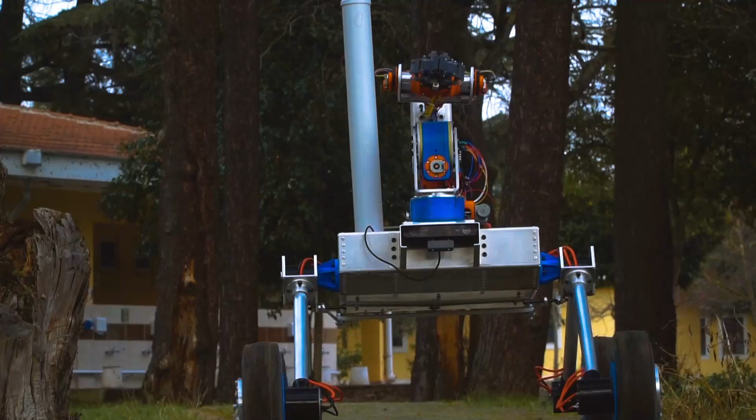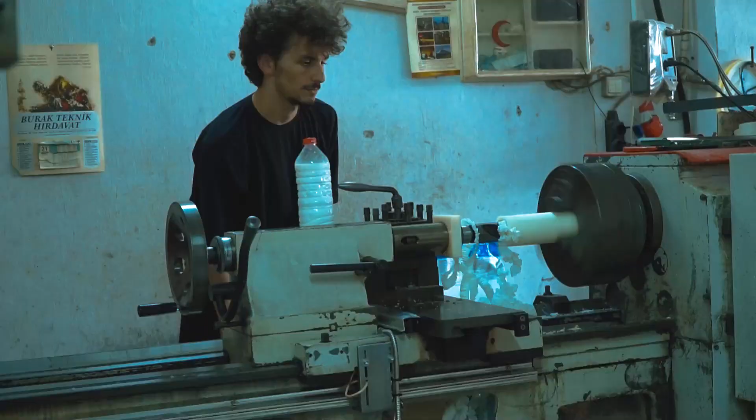Based on the previous experiences from last year, the new rover has been designed and manufactured to tackle URC competition tasks. The subsystems were analyzed in simulations and tested on each task to ensure all requirements are met. After 8 months of hard work, we are proud to introduce our next generation rover.

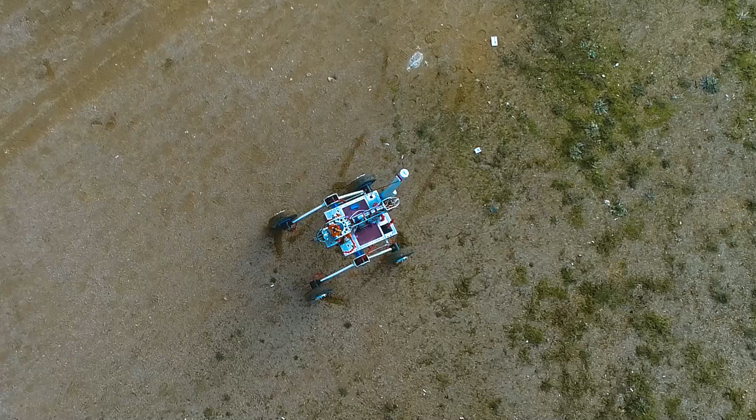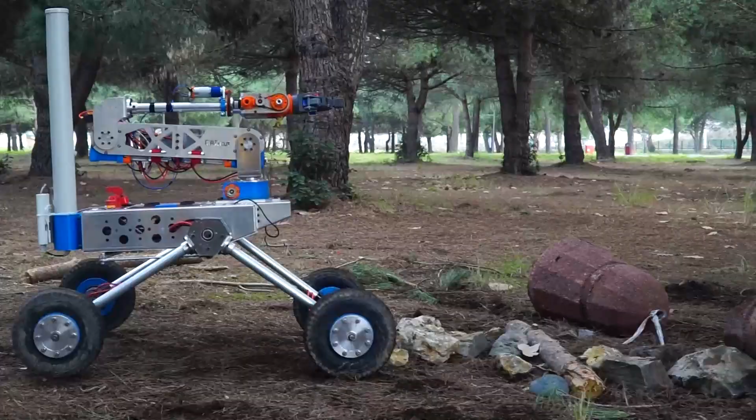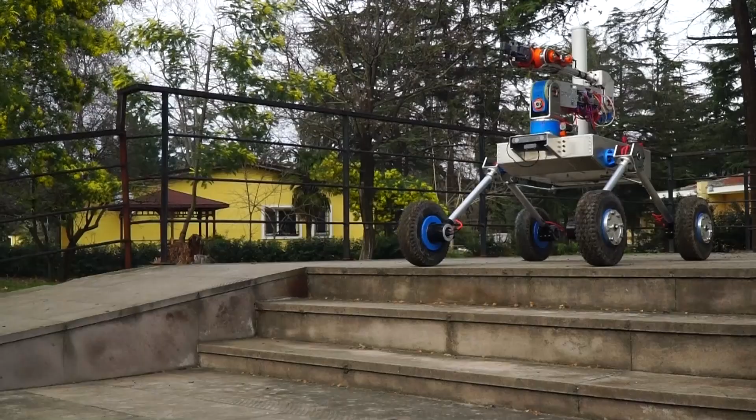The pneumatic tires absorb shocks caused by falls, thus preventing the electronic parts on the rover from being damaged, and also improve traction. Powerful geared DC motors are used to help the rover climb steeper slopes in the extreme retrieval and delivery mission.

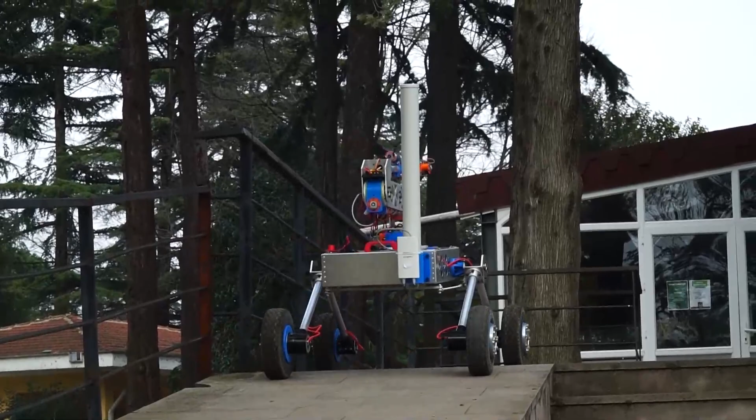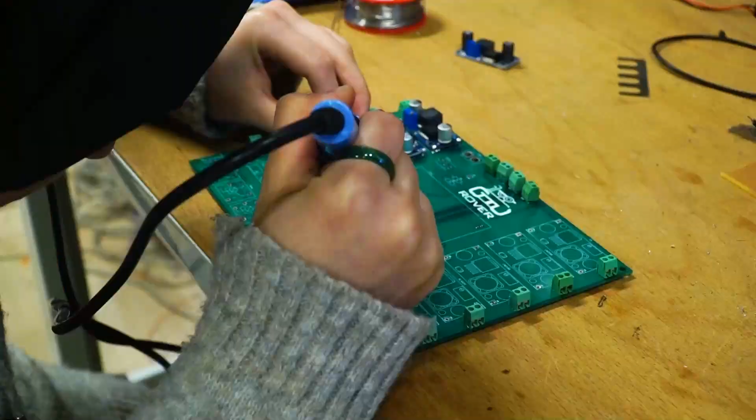To interact with the mechanical and software parts of the rover, we have developed our next-generation electrical system. Custom-designed PCBs allow easy integration and plugging of cables. For ensuring the safety of the rover, two emergency kill switches are installed.

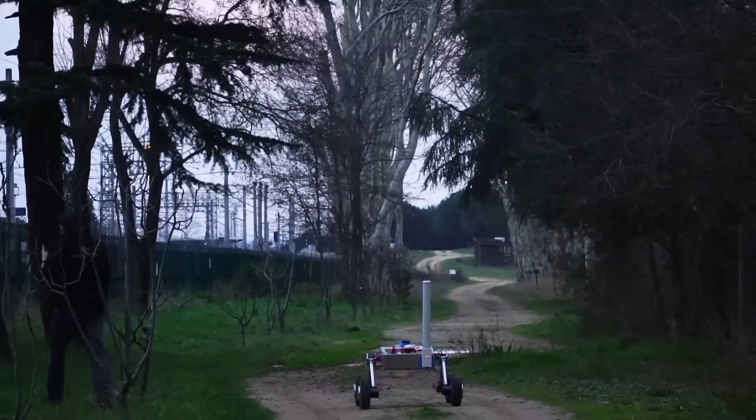The communication system operates in the 2.4 GHz band, along with an omnidirectional antenna on the rover and a sector antenna at the base station. The communication system is capable of data and real-time video transmission. In case of any connection loss, the backup module will be activated.

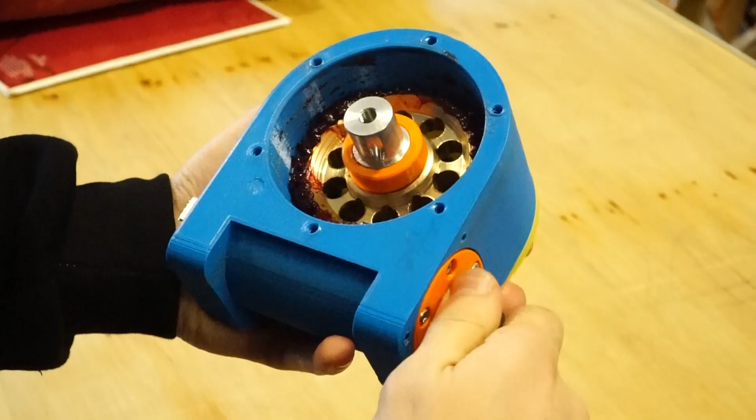A 6 degrees of freedom robotic arm was developed to have manipulation capabilities. For high kinematic reachability, rotational actuators are used in all axes. In the first 4 axes, worm gear mechanisms with geared DC motors are used to prevent back drive and provide required torques. The robot arm works precisely enough to manipulate the elements on the panel.

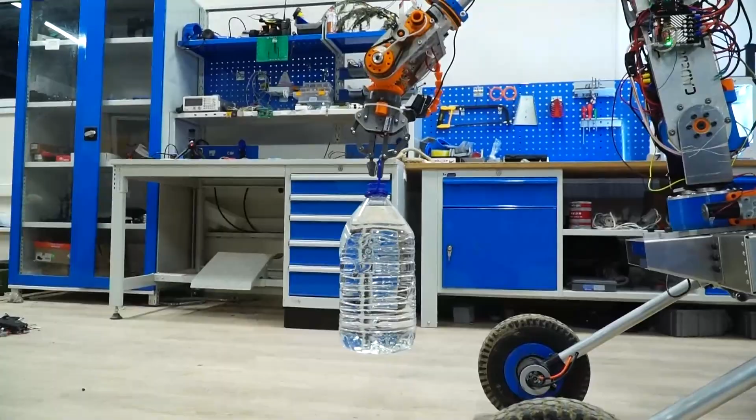A belt-driven differential wrist mechanism ensures better motion in the 5th and 6th axes. With the high torque joints, the robotic arm is strong enough to lift a 5 kg payload at full extension. The control system and interface allow operating the arm by inverse kinematics and switching to forward kinematics when needed.

The spherical wrist design enables the arm to flip switches and type on the keyboard smoothly. You can press the side buttons and tighten after inserting the hex key into the screw.

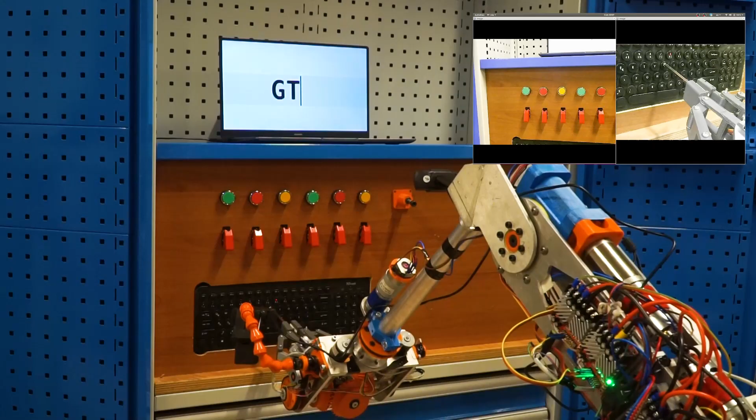For the arm's motor driving, RoboClaw motor drivers with integrated PID controllers were chosen. Incremental encoders are used to read motor positions.

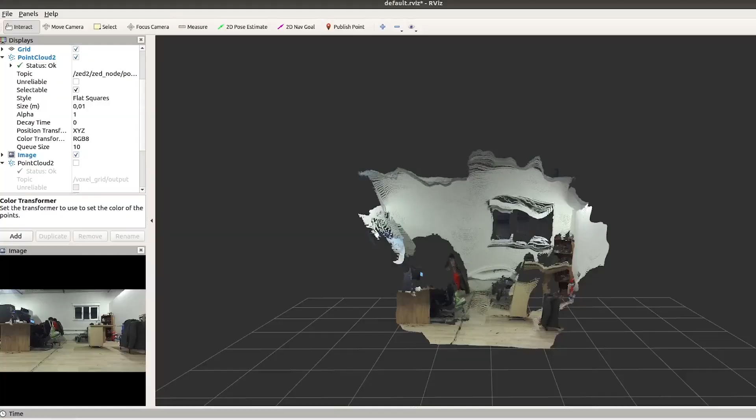To perform the autonomous navigation mission, the ROS navigation stack was used. Point cloud data from the ZED stereo camera is downsampled with a voxel grid filter. The obtained cloud is used to generate the local map, and a 2D LiDAR sensor is used to generate the global map. After the maps are created, the A-star algorithm is used to compute the global path and compute the local trajectory.

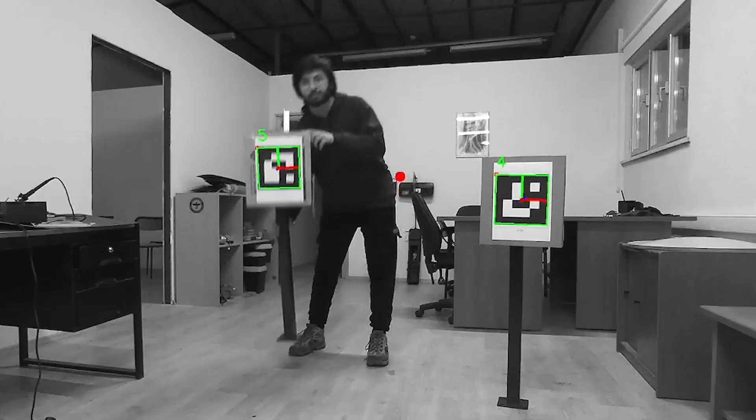A time elastic band approach is implemented. The ZED stereo camera and OpenCV library are used to approach gates and posts with detection of ArUco tags. To pass through the gates, we developed an algorithm that can find the position of the middle point of the gates in real time. This way, we are able to give direction to the rover.

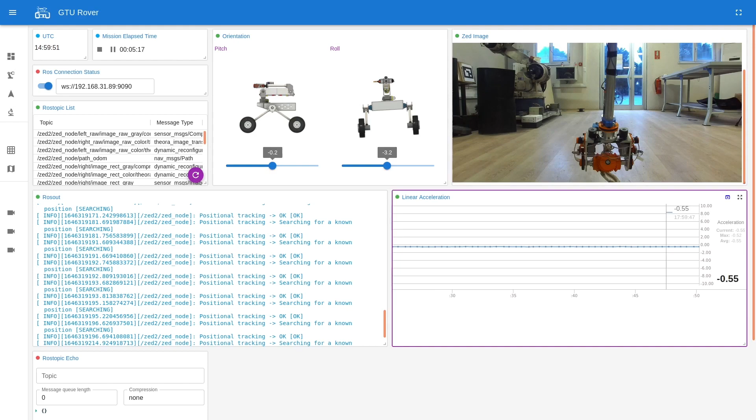The interface is a web-based React application providing mission control and data visualization. There are customizable layouts according to the mission. They allow remote monitoring of system state, streaming camera feed, monitoring of sensors, publishing waypoints, and robotic arm joint states and joint control.

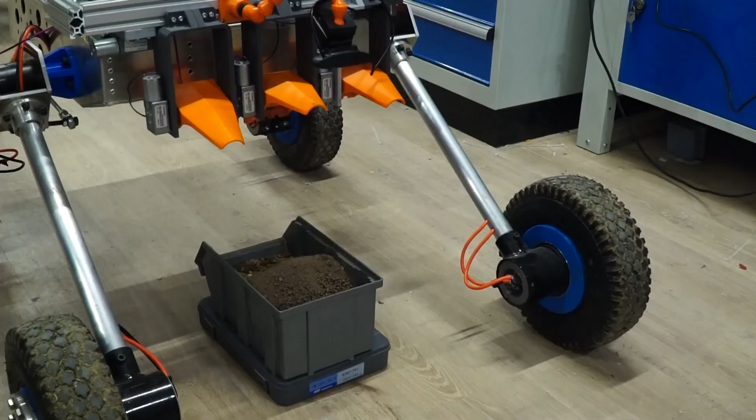The science team searches for different types of life detection analyses and integrates them on board. 3 separate scoops are linearly actuated to collect soil samples without cross-contamination. After that, the collected samples are transferred through plastic pipes to the test tubes in the FTIR spectrometer.

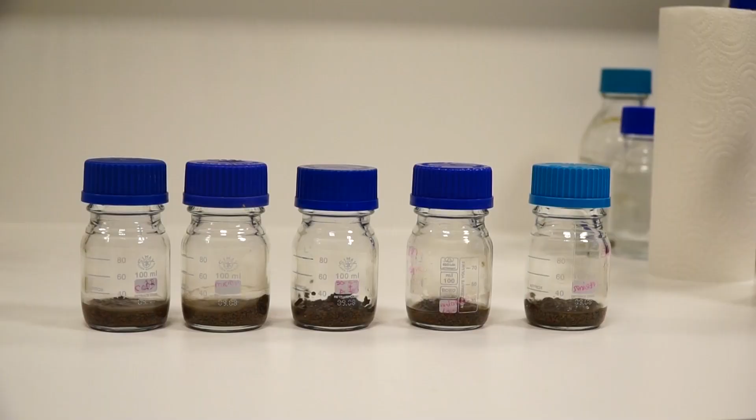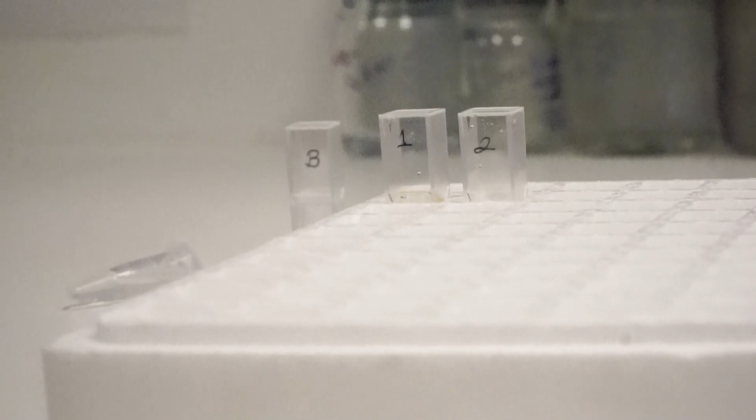We prepared our samples to mimic Martian soil, and with them we optimized ATP and DNA detection assays to get the best results. With a custom Fourier transform infrared spectrometer, we aim to analyze the type of molecular bonds in the sample to detect the presence of biosignature molecules.

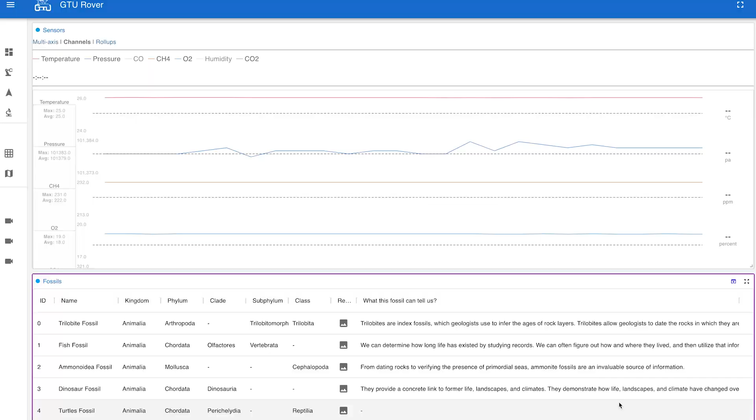The team aims to identify traces on the rock surface and determine if it's related to life or a rock's mineralogical property. A deep learning-based algorithm was developed to match rock images from the cameras with the dataset created by the team. A set of sensors were integrated to observe the environment and evaluate the test results from soil analysis correctly.